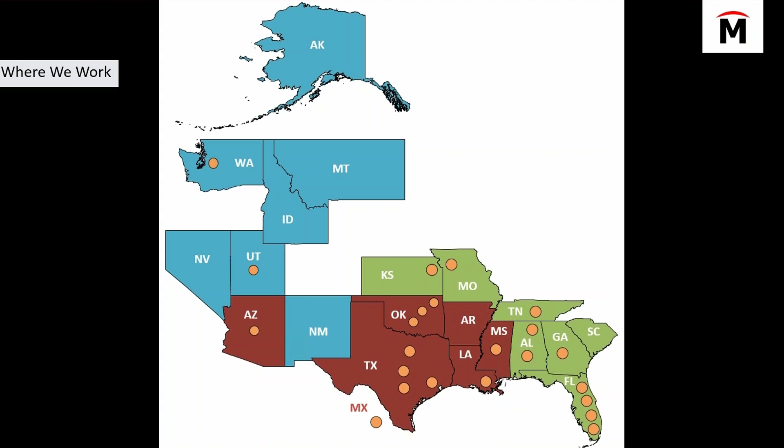This is a map of our territory. Everywhere that you see a dot is a physical brick and mortar office for MLC CAD Systems. And what's great about online training is you don't have to actually be in the office to take this training. You have more available classes to you since they're all online. So let's go ahead and get started and take a look at what online training looks like.

I want to get started and show you an example of what it's like to go through some online training with MLC CAD Systems. And what we're going to do is we're going to build a ratchet. And I'm going to build a ratchet that looks like this, so I want you guys to know where we're going. You see that we got a nice little ratchet here. There's no guts inside of it. This is just the actual finished product.

And the reason I like to show this is because even in a training class, I want you guys to understand where we're going and not just be led around learning features blindly. So I want you to have an idea of what we're trying to accomplish with the features that we're learning. So with this ratchet, it's comprised of three main sections. There's one right here, that's the handle. There's a neck, which is in between the handle, and then the last piece, the head. So we're going to make three separate features, learning some different tools to accomplish those features.

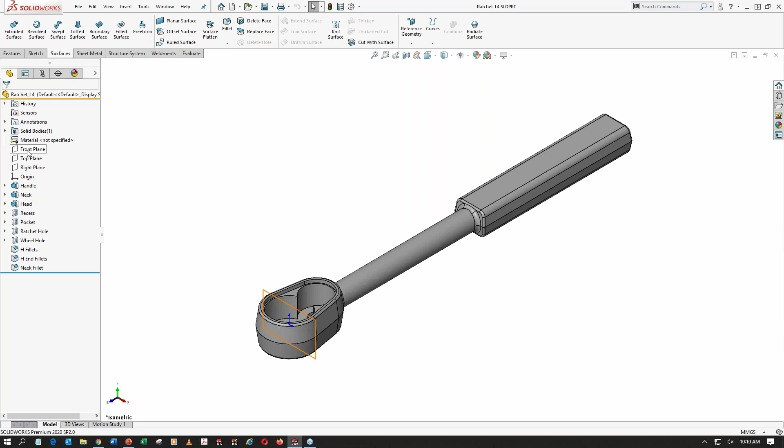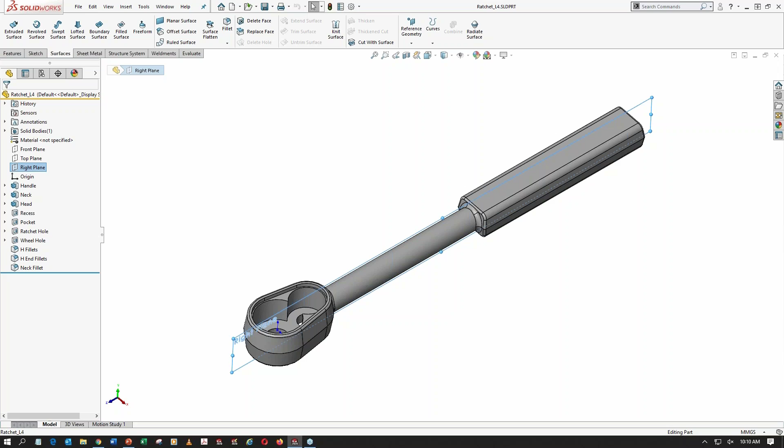Now, I do want to point out that we're going to build in some symmetry on this model. So you can see along the top plane that this model is very symmetric about the top plane. It's also symmetric about the right plane. So when we're designing this with our design intent, we're going to make sure that it's symmetric about the right and the top plane. So we can accomplish that with sketches, and we can accomplish that with features.

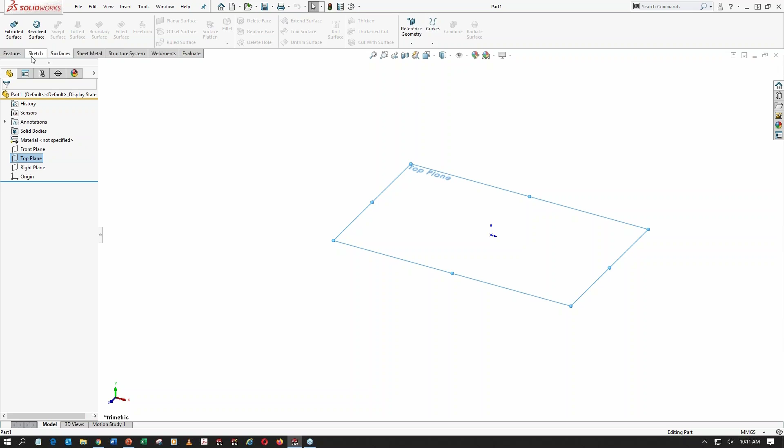So the very first thing we're going to do is we're going to sketch and we're going to model the handle. So I'm going to start brand new. I have no tricks up my sleeve. Just start with a brand new file here. I'm going to use a millimeter template. Obviously, there's no features in the tree, and there's nothing crazy going on. But the first thing I want to do is select my top plane. And when I select my top plane, I can then go to the Sketch tab and fire off an actual sketch.

Now, in some lessons, we talk about different topics, and in this topic, we talk a lot about construction geometry and symmetry. And one of the things that you can do is you can use this tool called a construction line. It's also called a center line, depending on if it's used in the center or if it's not in the center of something. But we can use these to reference what we call the origin, which is our 0, 0, 0 point out in space, and then draw some shape out in space without having to dimension all the way to the origin.

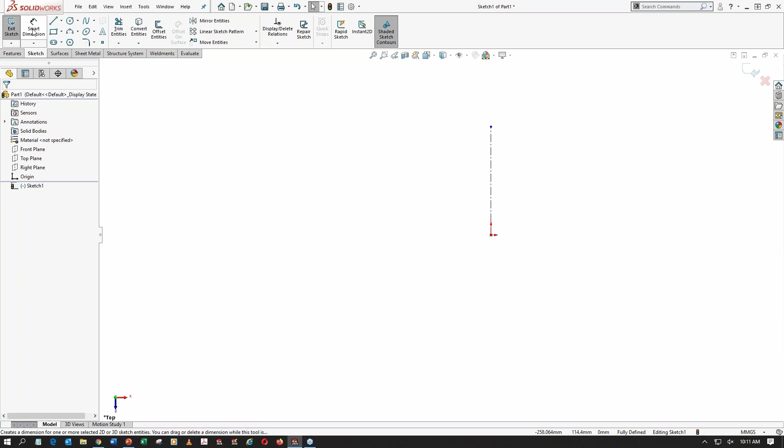So what I can do is I can then fire off Smart Dimension and grab the value of this and give it a value. In some other CAD systems, you've got to enter values in different places, maybe in the properties of a line. But with SOLIDWORKS, you're going to draw the line, and then you're going to tell it how long you want this to be. It's going to be 220 millimeters. Notice I didn't type any units. That's because we're in a unitless system. You just define the units up front, and then all you have to do is type your numbers.

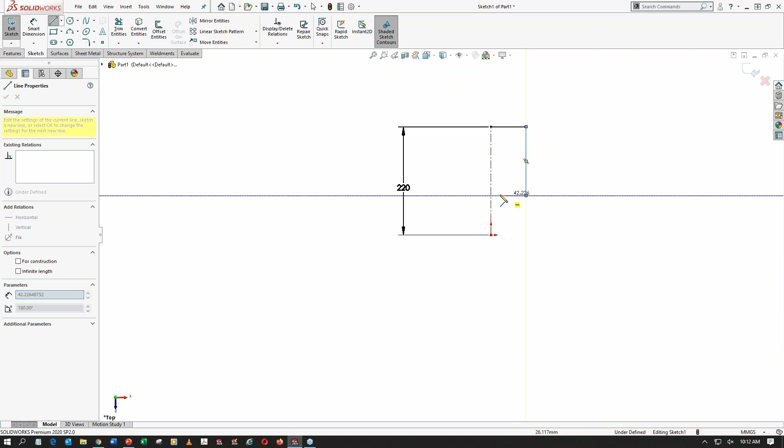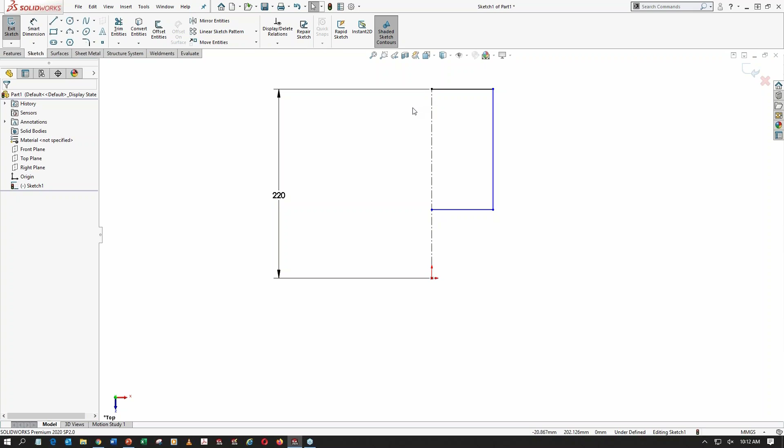Now, the reason I drew it like this is because what I would like to do is select all three of those lines and then mirror those entities around that construction geometry. So by hitting Mirror Entities, I can then say mirror about and choose this construction line. And now wherever the one rectangle goes, the other one will also follow.

So at this point, to fully define this sketch, and fully defining a sketch means that the sketch cannot be pulled any way, it is fully defined in X and Y, we're going to use our Smart Dimension. Now I want the overall length of the handle to be 100 millimeters long. Notice that the lines on the ends of our rectangle have now gone from blue ink to black ink. The reason being is lines that cannot be moved are in black ink. So you see now this rectangle can only be pulled left or right.

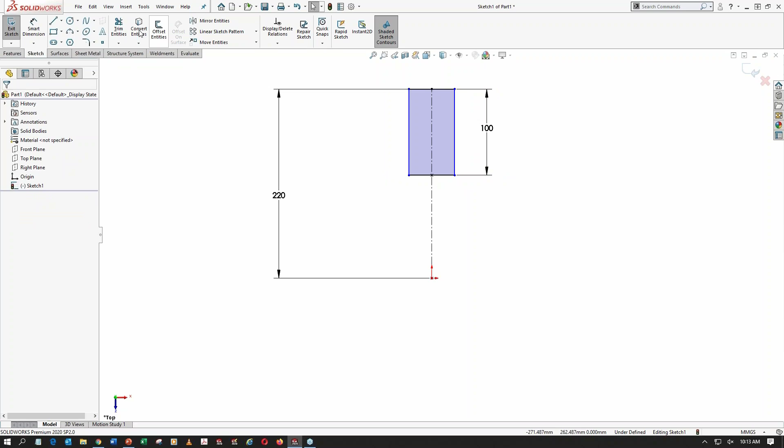All right, so at this point I need one more dimension, and this dimension is going to go all the way across that construction line, indicating that this is the overall width of this handle. And I want that to be 20 millimeters. All right, so now our sketch is completely defined. It says fully defined down here in our status bar. All of our sketch lines are now black, and we can now use this sketch for a feature. To do that, all I have to do is tell the software which feature I want. So I can go to the Features tab, and then I can fire off Extrude Boss Base.

Now I do want to point out that during training classes, what I like to do is go in and make sure that everyone can see things by highlighting and just circling things that might need more pointing out, and yellow is a bad color, red's a little bit better of a color. So if anybody asks, hey, where was that? Then all I have to do is circle it, and everyone can see exactly what button we're talking about. And that's that Extrude Boss Base.

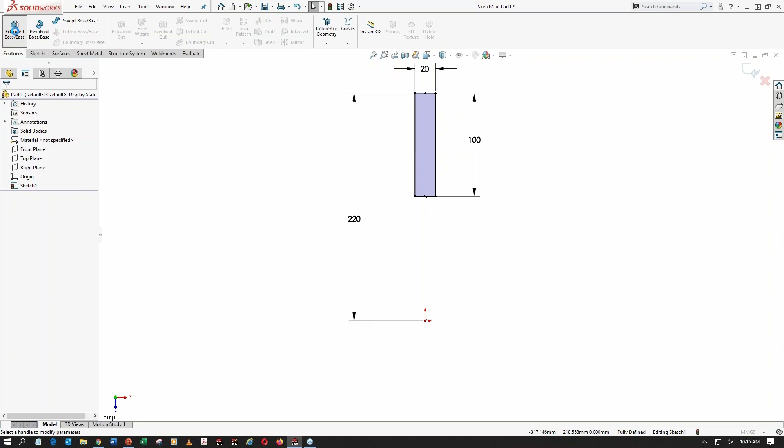Now when we extrude this, I want to make sure that we're building in that symmetry around the top plane and the right plane. I can do that by using an end condition called mid-plane. Now when I do a mid-plane extrusion, whenever I enter the value of this, I want to make sure that that is the value overall. That is not 15 millimeters on each side. That is 15 millimeters as an overall value, with our sketch being in the center.

Now, if this is going to be like an injection molded piece or a forged metal piece, then we're going to have to add some draft onto some of our faces, unless we just really want to ruin our mold the first time we use it. So we're going to have to add some draft. Now, I can add draft in a couple different ways. One of the ways is during an extrusion, and that's by activating this button right here to turn the draft on. And then I can add 8 degrees of draft.

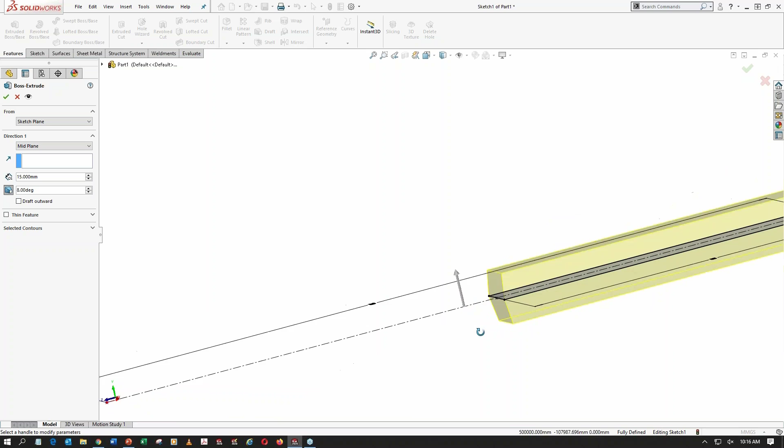Notice that whenever we add draft during an extrusion, it's going to draft every face. So you'll see that all of these faces all the way around are getting drafted. The last thing we want to do is draft outward. That's going to break our mold, and it's not going to be pretty. So I'm going to uncheck draft outward and make sure it's drafting inward.

Then I can hit my green check, and you'll see that I now have our handle out here in space. Now, one good thing that I would strongly recommend whenever you're modeling in SOLIDWORKS, a best practice to follow, is to name your features. Because when you get later down in a model and it says Boss Extrude 37, that doesn't mean a lot to anyone.

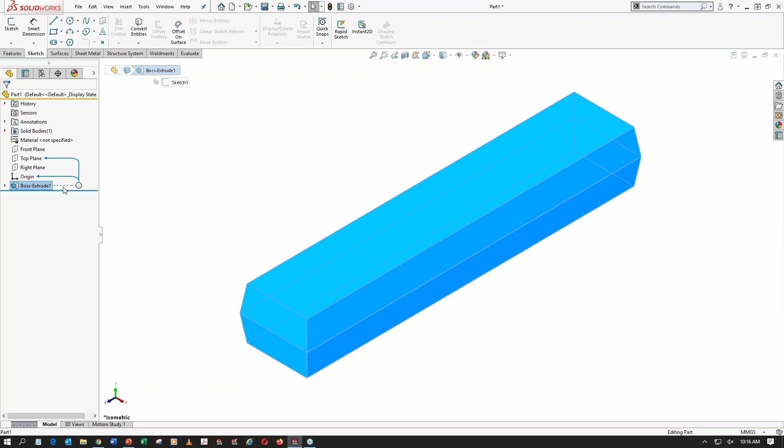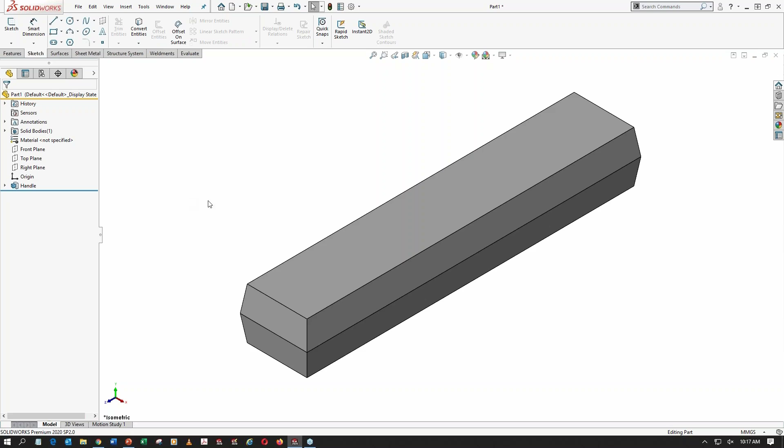But if you were to come in and rename this feature to handle, then that tells everyone exactly what part of this model that feature goes to. So you can do that with any feature. I strongly recommend naming features as you go, rather than going back and going, okay, this is still at 37. What does that mean? You can do that, but it's just not as easy.

Now notice that our origin is down here. That's because that's the only known point in space, and we use that construction line to design the handle way off in space. It was fully defined because we used the construction line to reference the origin.

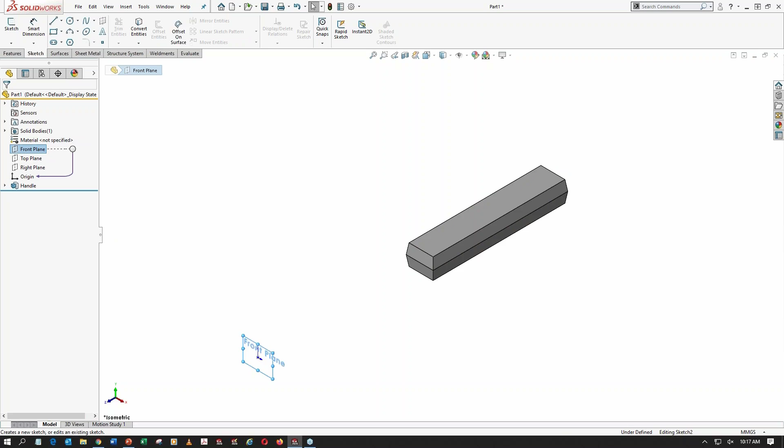But now what I want to do is I want to sketch on my front plane. And when I fire off a sketch on my front plane, my camera position is going to go normal to that plane. Now, if you don't want to do that, you can always use any keyboard shortcuts, or you could move your cursor to rotate your screen, but it's perfectly good for right now.

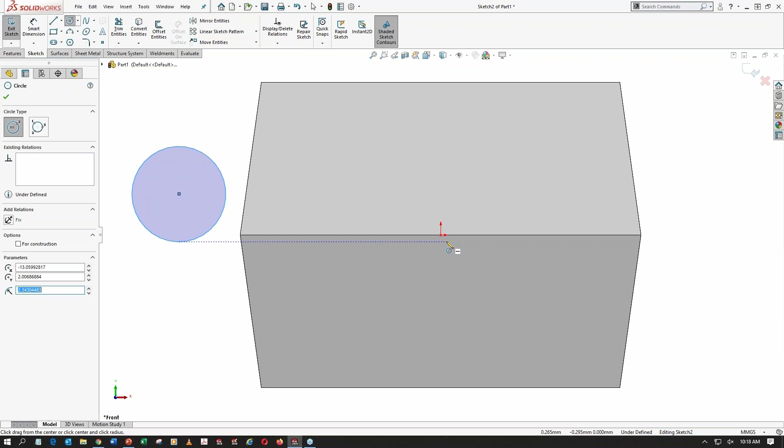I'm going to activate a circle command. Now the circle command is 2 clicks. So you're going to click the center and then the radius of the circle. So I want to put that right on my origin. And notice the yellow box indicating a sketch relation of coincidence. So that means I'm going to put the center of this circle on my origin. And then I can click again to give it a radius or a diameter.

Now I'm going to delete that first circle because we only need one. Notice that this circle will get bigger or smaller whenever you drag it. And next thing we need to do is fully define it by giving it size. To do that, I'm going to fire off the smart dimension.

Now, I do want to point out that down here, there is a size dimension for these circles. I would strongly recommend that you don't enter the value there, because if you were to enter the value there, you can just simply drag it and that value gets overridden. So you can see if I add 5 to that value and then I drag it, that value is just simply overridden. It is not anything that's set in stone at all. I would recommend using the smart dimension tool rather than the parameter.

So at this point, we can now give this thing a size. I want it to be 12 millimeters in diameter. The default for a smart dimension is diameter whenever you're defining a circle. Now I do want to point out that you could also go in and display as radius if you needed to. That's very beneficial whenever you need to pull dimensions into your drawing.

So I would recommend that however you want your dimensions showed on a production drawing, you should put those dimensions all the way down into your sketch level. In this scenario, I just want the diameter, but I do want you guys to know that you can define dimensions as radius or as a diameter.

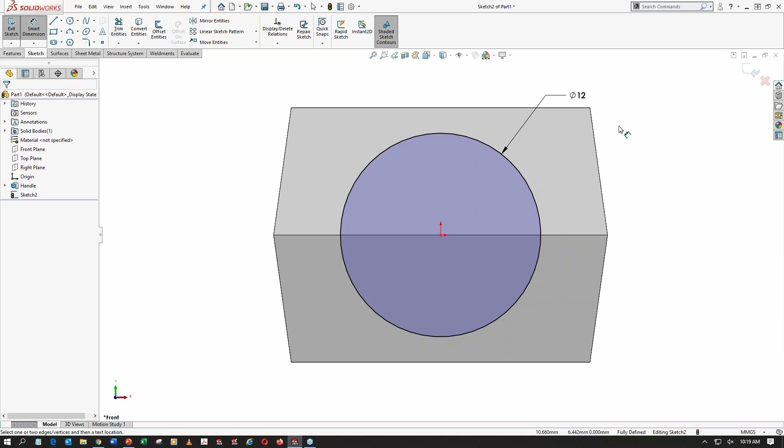Now I want to take this and I want to extrude this. And when I extrude this, I want it to go toward my handle. So that's going the wrong direction. I can either grab this handle and pull it that way, or I can hit this little flip direction, reverse direction button, these 2 opposing arrowheads. You'll see that my preview flips, and now it's going toward our handle.

Now, I don't know what that dimension is. Well, I mean, I do if I want to math it, but mathing's hard, and I don't really want to math. I mean, don't call me lazy, call me efficient. What I want to do is I want this to go all the way up to the handle and just match that face. So instead of mathing, I can use a different, what we call end condition.

That end condition, by default, is blind, which is like telling the Hulk to put on a blindfold and take X number of steps, or step X distance. And he can walk through any features or cuts or anything like that.

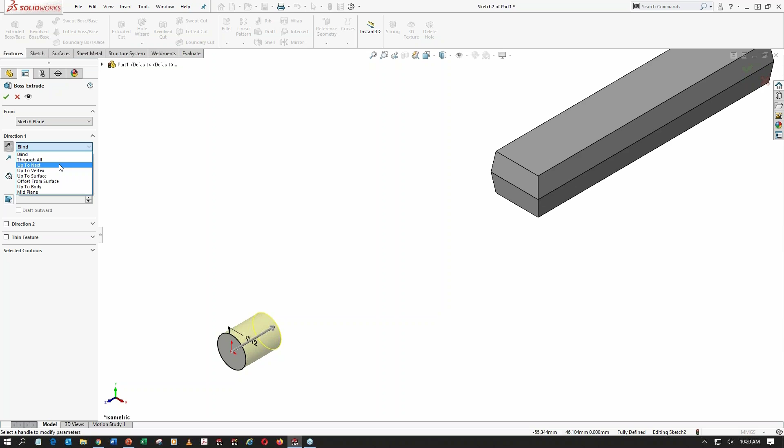But what I want to do is I want to say that I want to go up to next, or up to surface, or up to body. One of these is a little bit better than the other. But if I choose up to surface, and then I choose that surface, that looks right from this perspective, but you'll notice that whenever I mouse around and I rotate my view, that might not work. We could have issues with that.

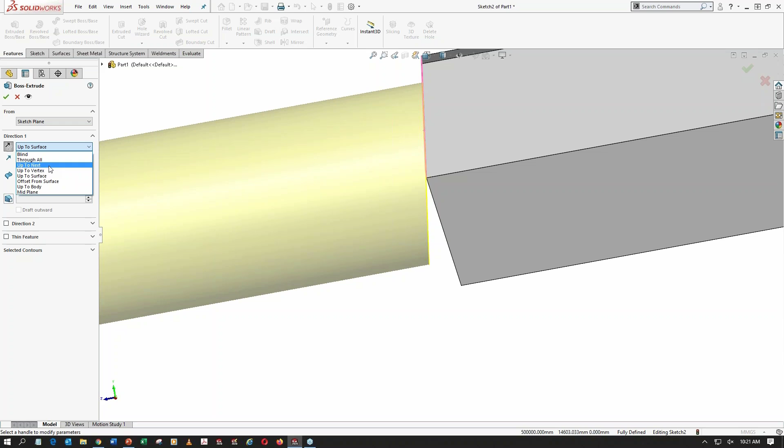We could be creating a torque wrench or a single-use wrench, maybe a Harbor Freight wrench. So maybe what I want to do is have that match all the way to the handle. So this might not be the end condition that I want. Now there's 2 other end conditions that are a little bit better than up to surface. One of them is up to body. Now when I choose up to body, I'm forced to choose the body that I want it to go up to. So that's an extra click.

I want a super efficient mouse. So instead of all these extra clicks and extra movement, what I can do is I can just say up to next. And it just goes up to the next faces and says, cool, I'm done. I can then hit my green check mark to accept that feature. And instead of Boss Extrude 2, I want to rename this feature to neck. This is the neck of the ratchet. So notice that when you're renaming your features, it is very beneficial to be able to see that and go, okay, I know exactly where that is on the model.

Now the next thing that we're required to do in this design is create the head of the ratchet. Now this is probably the most complicated section of the ratchet. Even though it's not that complicated, it's a little more complicated than a rectangle and a circle. In reality, it's just 2 circles with 2 lines. So I guess you could break that down to 2 lines and 2 arcs. But what I want to do is sketch that on the top plane. And the reason I'm sketching that on the top plane is because we're building in that symmetry. Just like I did for the handle, we extruded in a mid-plane extrusion so that we're building that symmetry. I'm going to do the same thing for the head.

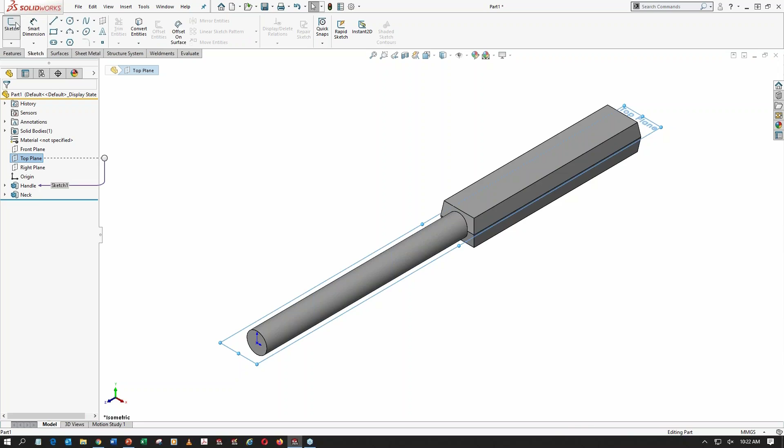So on the top plane, fire off a sketch, and then I'm going to sketch the head shape out here. Now, one thing that I like to do sometimes is draw my shape out here, fully define it, and then snap it into position. And that's what we're going to do for this head. So I'm going to draw with a line.

Now, whenever you're drawing a line, when you complete that line, notice that SOLIDWORKS is a click operation. It's real clicky like a high school. Not that it's bad, but whenever you come back and you touch that end of the line, it's going to turn it into an arc. So it's automatically switching from the line tool to the arc tool. So what that means is you could come back and turn it off by touching the, oh dang, it didn't turn it off. It stayed at an arc.

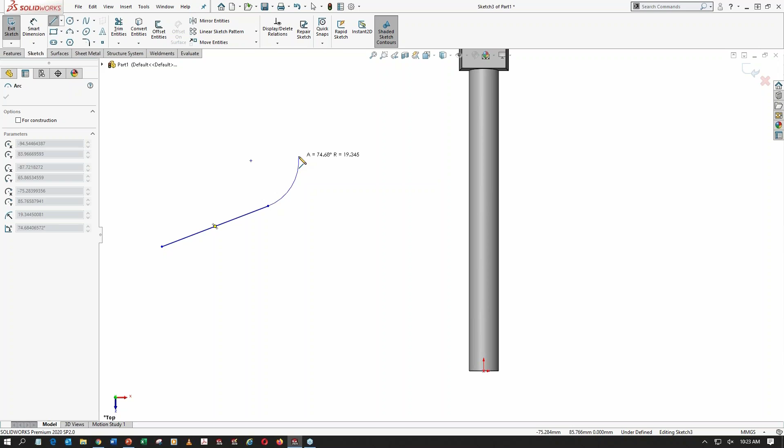So instead of coming back and touching it and turning it on or off, you can hit the A key, A for arc. So notice that it's still in our line command. If I hit A for arc, it then goes to that arc command. So you can very quickly draw shapes that require lines and arcs. So pretty quick you can draw any shape you want with a line and arc.

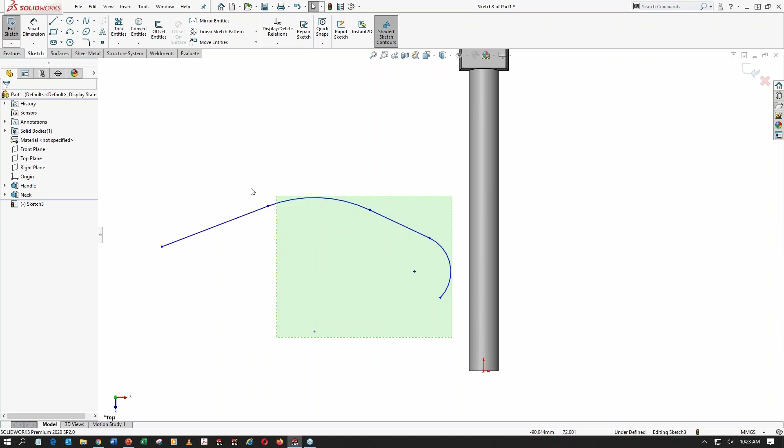Now I want to draw the head of this ratchet. Now I want to reference back to this completed ratchet. And if you'll notice the shape of this ratchet, it's an arc with a line and an arc and a line. All right, so it's not terribly complicated, but that's the shape that we're going to draw.

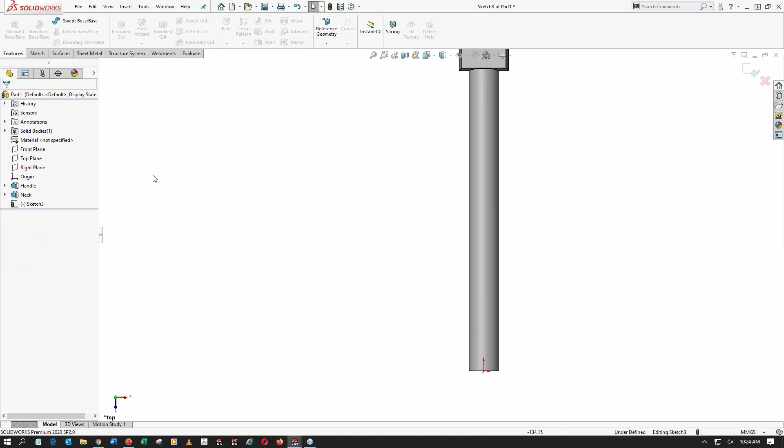So on our sketch tab, I want to fire off a line, and then I'm going to go straight up, hit A for arc, come all the way over, and use my blue inferring line so that the endpoints of these arcs are horizontal with each other. And then I can ride down this yellow inferring line until I see my blue inferring line, indicating that I am tangent with the arc that I was just drawing, but I'm also horizontal with the start point of that first line. When I see that, I can click again. Now it's still in our line command, but I want to go back to an arc so I can hit A.

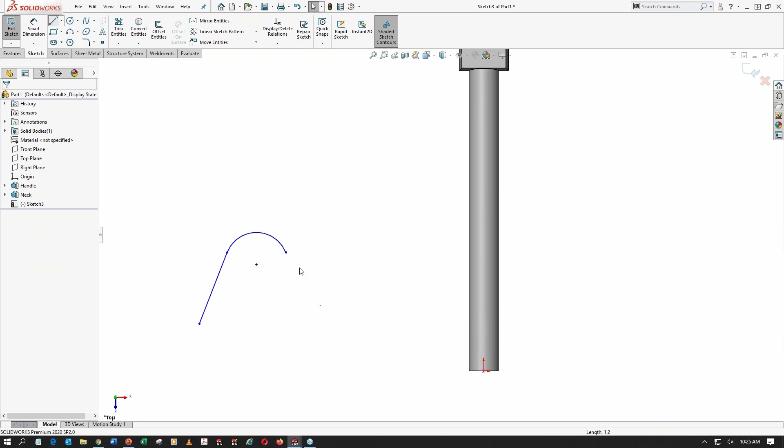Now, one thing I see people doing is holding down A. Don't do that, because then it just swaps really fast between line and arc. That is definitely not what we need to do. So just make sure that you're not holding down A.

Now, I'm going to go back to arc, come all the way back around, and then what I can do is turn on my sketch relations. So I can turn these things on right here. Sketch relations look like a little perpendicular symbol. And notice that I have a tangency there and I have a tangency there.

I need 4 tangencies, so I want to make sure that this point, and starting in 2019, you can click on a vertex and choose Make Tangent. You'll see that that tangency then pops up. Because prior to that, you had to choose a line, hold Control, choose the arc, and then you can make that tangent, or you can add the relations over here in the property pane. Either way, I now have 4 tangent relations.

Then I can draw a center line between the 2 centers of the arcs. Now the reason I like to do that is because I have a handle. I can yank this shape around with this construction line. It gives me something that's a little bit easier to dimension as well. Plus, I can choose this line and add a relation to the line. I can say that that line is vertical, which then forces the 2 arc centers to be vertical. So that's perfect. That's exactly what I want.

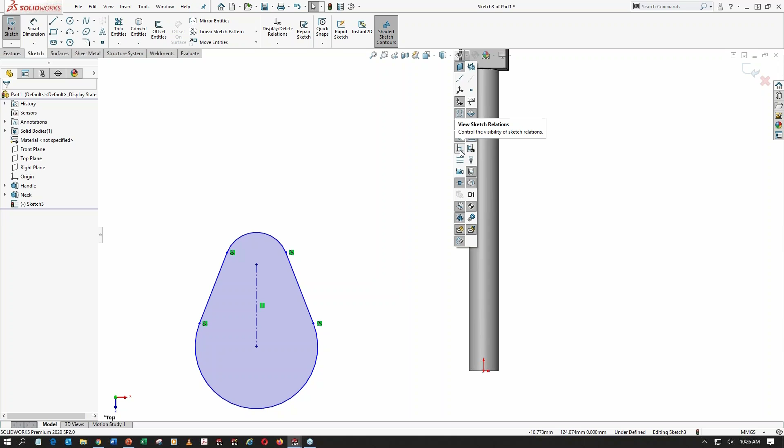I'm going to turn off my sketch relations because, now this isn't a complicated sketch, but in something a little more complicated, there could be a ton of sketch relations. So I'm just going to hide them, and it looks a little bit cleaner. Now I can dimension this thing. I want the overall height from center to center to be 12 millimeters.

Then I want to define the radius values or the diameter values of these 2 arcs. Well, the default for a complete circle is a diameter. But if you don't have a complete circle, the default dimensioning scheme is a radius. So this one is going to be a radius of 13. But if you wanted to show this still as a diameter, you could still swap this and display as diameter. So that way you don't have to multiply or divide by 2, because that can get complicated sometimes. Maths are hard. But this bottom radius is going to be a radius of 16.

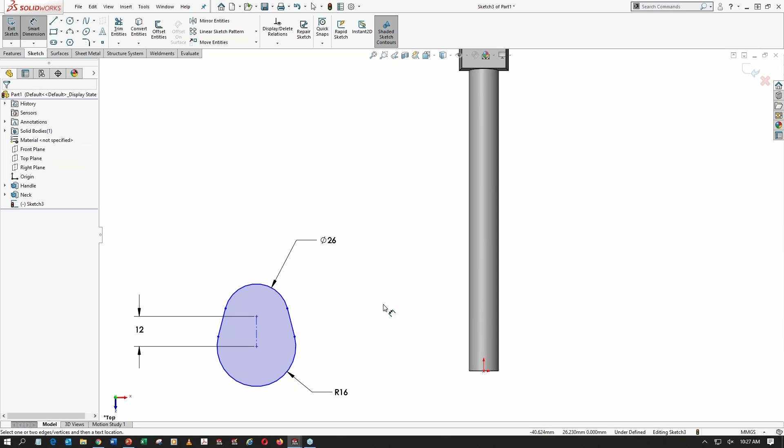Now, this is a fully defined sketch, except for the fact that it's not. How's that for circular logic? So you'll see that I can drag it around, and it moves in and of itself, and it doesn't distort. That's kind of the key to a sketch. Does the sketch distort? A lot of times in training classes, people ask, hey, is this sketch right? And when you look at it, it's still blue, so I ask them to drag a vertex. If it stays in the same shape but just moves, you're probably headed down the right path.

Now, I want to take the center point of this bottom arc. I'm going to hold Control, and then I'm going to grab the origin of our model. When I use Control in SolidWorks and select multiple things, it allows me to add sketch relations, or inside of an assembly, it will allow us to add things like mates. But here in a sketch, it will allow me to add sketch relations. Sketch relations are going to hold things together. It's like the glue inside of a sketch that holds all of your sketch entities together.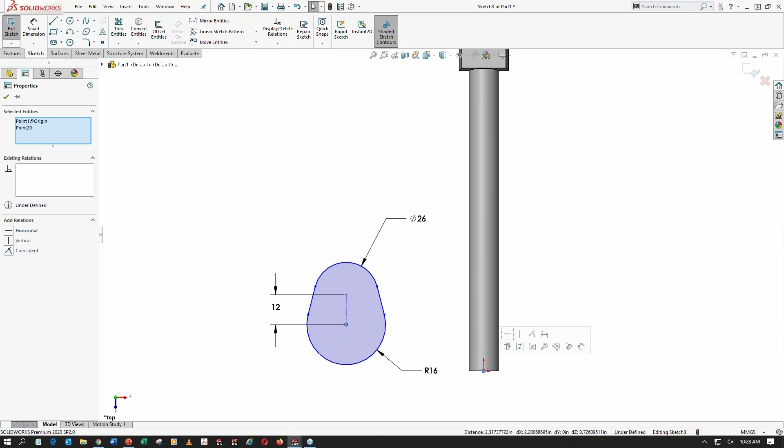So I want those 2 points to be coincident. So they're just going to be smack dab on top of each other. You'll see all of our blue ink went to black ink, so now we're good to go. In our status bar, it says fully defined. And at this point, I can now use this sketch for an extrusion or a cut if I needed to.

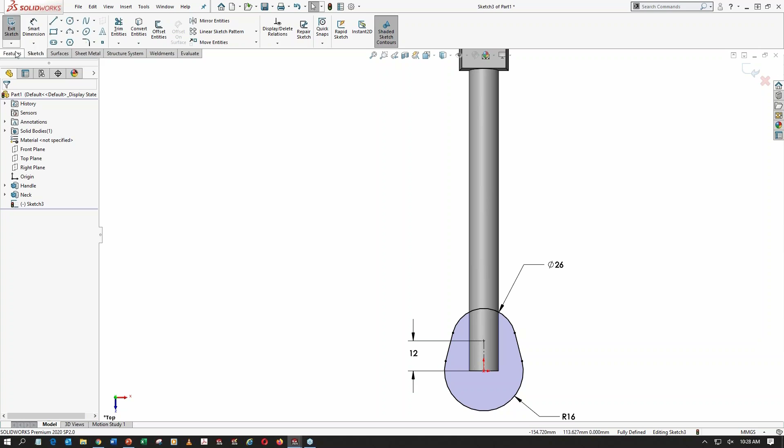In this scenario, I wanted to extrude it because we're creating the head of this model. Now notice it goes blind, and I don't need the blind extrusion. I want to build in that symmetry, not only in the handle, but also here in the head.

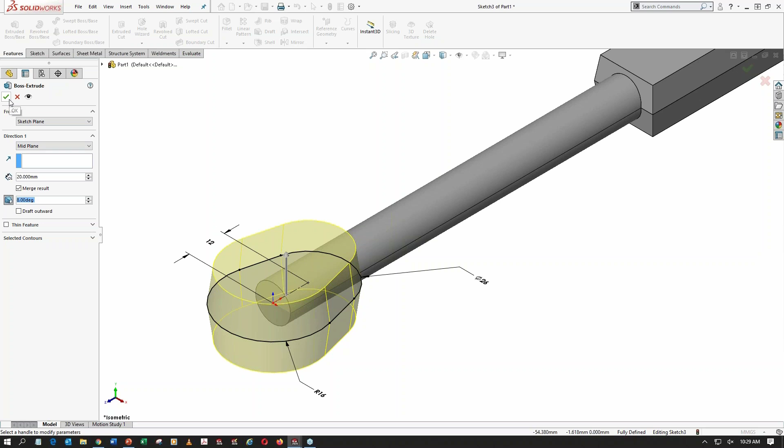So I'm going to change that end condition to midplane. Now, when I'm extruding this, again, remember that the overall height of this when using a midplane end condition is the overall height, not from your sketch plane out. So I want this to be 20 millimeters, and I'm going to add draft here as well. So I'm going to say, hey, you know what? I want some draft. I want 8 degrees of draft on this one as well, and then hit my green check. So you'll notice we now have the head of our ratchet.

One thing I want to point out, that when I edit this feature, when it's extruding, notice that we went around the shaft of that neck. Now, what happened to all that material inside? Well, there's this green check. There's a check box that says merge result. If you were to not merge that, then you're going to get 2 separate bodies. You'll see that there's a neck body, and you can kind of see it inside of there, and then there's also the head body.

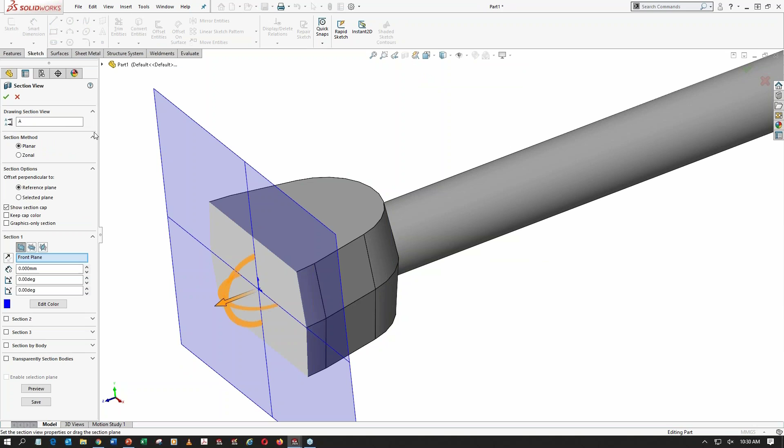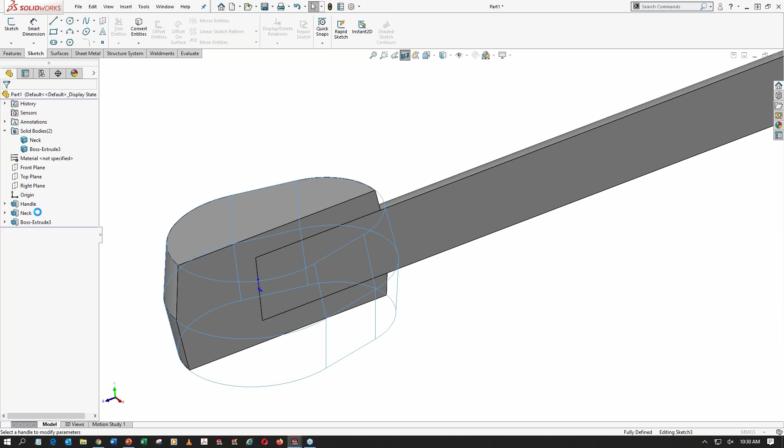Now, I don't necessarily want that in this scenario, but that is something that you could do, especially if you're designing something like manifolds or something that creates cavities inside of other geometry. In this scenario, I do want to merge that result, and I want to make sure that all blends together. Now, you can check that by hitting this tool called the section view. And if I were to section this model, you will see that now this is one solid piece of material, versus if we were to not merge that result, then it would be 2 separate chunks of material. So definitely 2 drastically different results from a tiny little checkbox. So be cognizant of whether you're merging results or not.

Now, to turn the section view off, all I have to do is hit the button for section view, and it turns it right back off. Now, I do want to rename this feature. We're going to rename this to head. So now you'll see that we have our 3 extrusions, and we have our handle, we have our neck, we have our head. Now, this is how we're going to show our model if we're going to get it forged out of metal. Maybe we're going to get this like cast steel or cast aluminum or whatever you're going to do to get this ratchet manufactured.

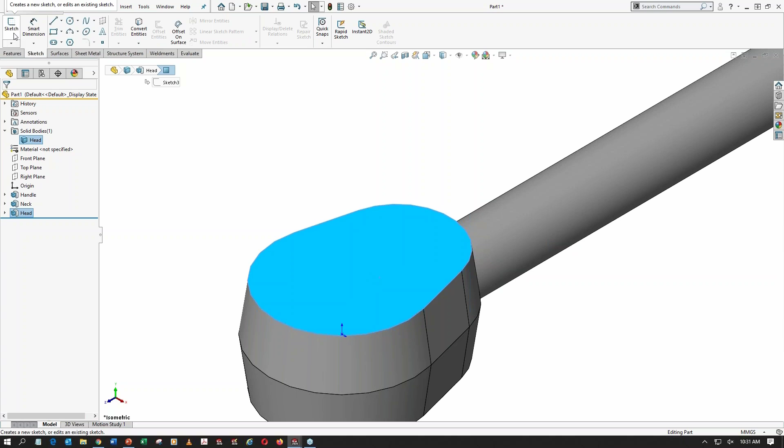But once it comes off the forge, we're going to have to show this in the machine state, right? So we're going to have to pull these into maybe a CNC, maybe a whole batch of them, and we're going to have to mill out the area for the ratchet internals. So let's tackle that now. So I want to create a recess where we have a piece of sheet metal that can cover all the internals so we don't get any dust in there, and it protects all the gearing, and we can keep it all nice and greased up. So in this space right here, I'm going to fire off a sketch. So I'm going to go to the sketch tab and hit the sketch button.

Now, again, it takes me normal to my sketch. That's like opening a notepad and saying you want to draw a picture. The first thing you're going to do is probably turn it towards yourself, normal to your view. If you're not, then you're just kind of drawing blind, like some of those challenges where people are drawing on each other's backs. So we want to make sure that we're not drawing blind. We want to be looking directly at it, and that's why our view changed to normal.

Now, I could sketch another shape in here. If my design requirement was such that I wanted a 2 millimeter offset from this existing edge out here, I could sketch that and I could dimension it. But let's not work too hard. Let's only work hard enough. Let's work hard enough to get our job done. So what I can do is I can come up here and use this tool called Offset Entities. Offset Entities will take an edge of any highlighted face, like what you see here, and will offset all of those edges in one direction or another.

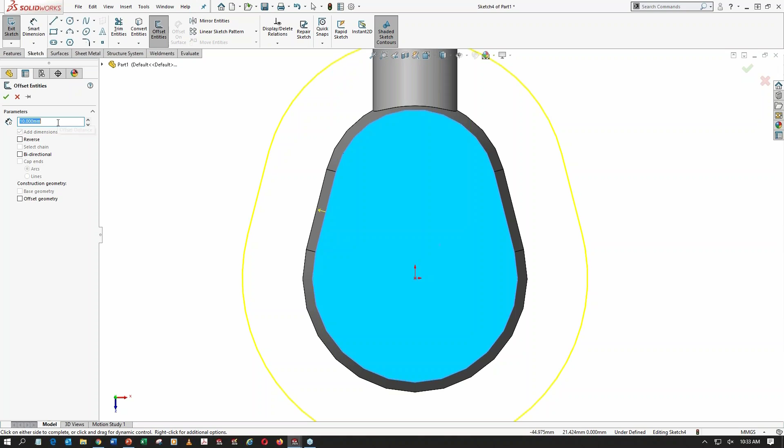So you see right here, it's a 10 millimeter. I can hit this reverse direction, and it will come inward, which is the direction that I want. But I want a 2 millimeter offset. So entering my value of 2 millimeters and accepting that command, you'll see now I have a fully defined sketch, and it's even driven with a dimension.

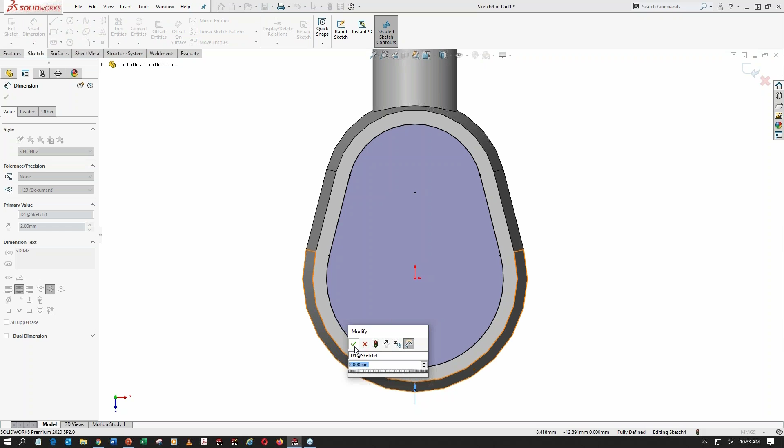So at any point, I could double click that dimension, and I could change that offset value. So it's very easy to create and modify offsets. Now I want a 2 millimeter cut. So we went 2 millimeters in, and now I'm going to cut down 2 millimeters. Maybe we have a piece of metal. Our cover is a 2 millimeter thick piece of metal. So we need to create a pocket for it, and we're going to call this the recess.

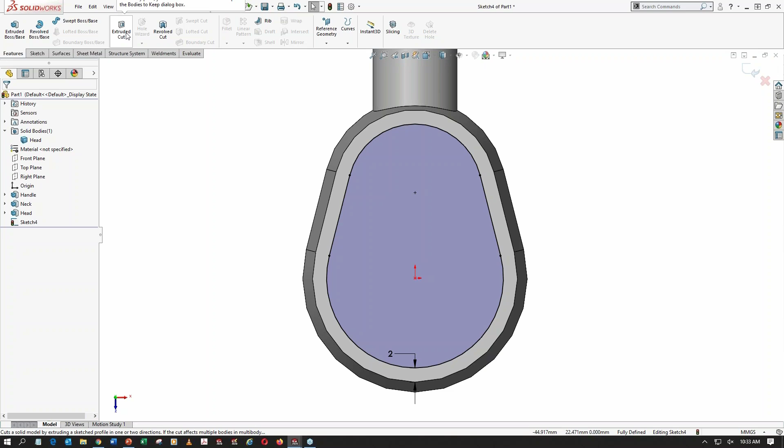So I'm going to hit Features, and we want to remove material this time. Up to this point, we've been adding material, and now we're going to remove material. So Extruded Cut. This one is going to be blind because I know for a fact that it's 2 millimeters. It's a fixed size, so it will always be 2 millimeters. So I can then hit my green check mark. Again, we're going to call that the recess.

And so R-E-C-E-S-S, one of those words I spell wrong all the time, so I just kind of say it like Mississippi. But anyway, we have handle, neck, head, and then we have our recess.

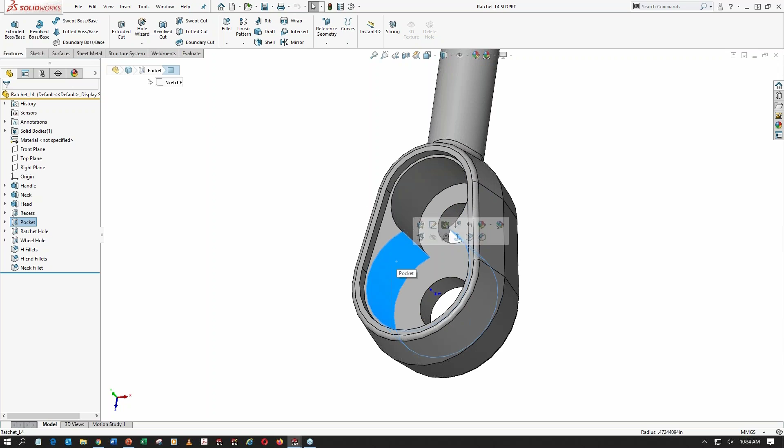Now, I want two massive circular holes. If we go look at our completed ratchet, you'll see that we have these two circular holes. Now, these circular holes are going to allow us to put all of our gearing in here. And when we put our gearing in there, we're going to need that space. So we're going to have to remove that material so that we can actually add our gearing. So we're going to have a ratchet area and a wheel area. Now, to create this, what I need to do is create two circles and then remove the material in between.

So let's jump back over to our in-process or in-work ratchet. I need to create a sketch right here. And when I create that sketch, again, it's going to go normal to my view. I can zoom in. I can then put a circle. And I want to do something that's called waking up the center point. When I wake up the center point, all I have to do is hover my cursor over the edge. And then it will divulge the center point of that edge that you're then hovering over. So then I can use that for a coincident relation to put this circle.

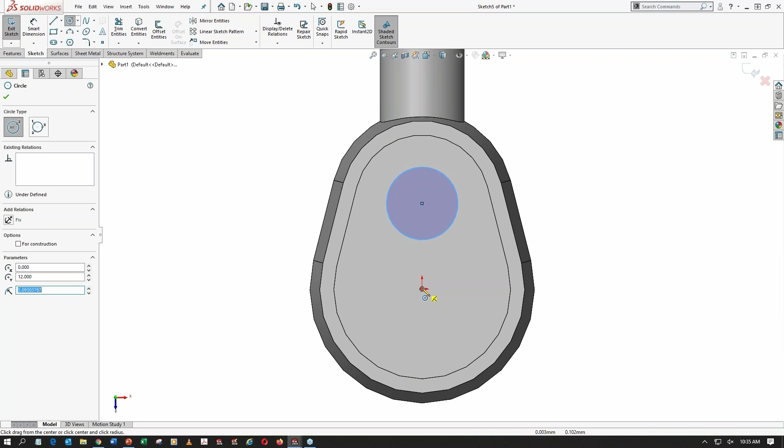I can then come down here, and the center point of this was actually the origin, because that's that sketch relation that we created. So whether you wake up the center point or whether you use the origin, either way, they're in the same spot. So I'm going to make a coincident relationship right there, and then go ahead and place it. Now, all I have to do again is to define these in shape. So their position is defined, just not their size.

So this is going to be an 18 millimeter diameter circle, and this one is going to be a 24 millimeter diameter circle. Now, I want to remove that material inside. So if you're talking about a Venn diagram, I want to remove the section in the middle that's the same.

Now, whenever we're talking about Venn diagrams, all I can think about is Venn dieselgrams. You guys probably didn't know that there was such a thing as a Venn dieselgram. It's just like a Venn diagram, but a little more complicated. So does everyone remember what Vin Diesel looks like, right? If not, then Google it really quick on your phone and look at Vin Diesel. And then I want you to understand what a Vin Dieselgram looks like. So if The Rock and Joe Pesci had a baby, he would look like Vin Diesel. The longer you look at it, the scarier it gets. So go ahead and lock and load that one in your back pocket so you can discuss it at the water cooler with your coworkers. So just take that one and do what you will with it.

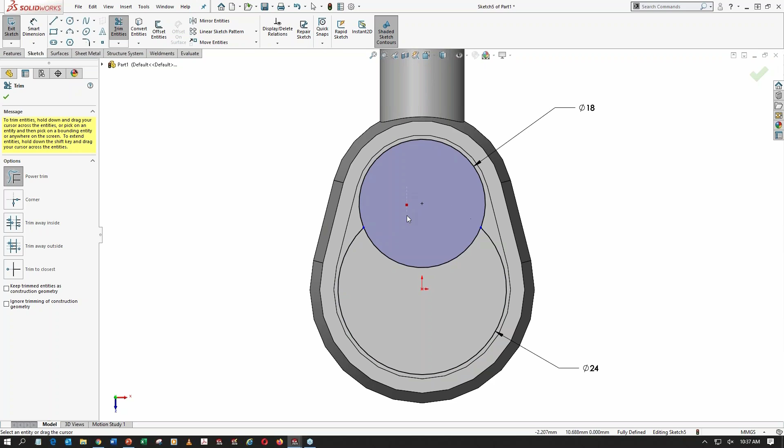But what I want to do now is I want to use this tool called Trim Entities. And I can use Trim Entities to get rid of Vin Diesel. All right, so we can just get rid of that, and now we're left with The Rock and Joe Pesci. Now, the trim command is really awesome. I like the trim command a lot because you can take any lines that you might have, and you can use the trim command to either extend or to trim away.

So in this scenario, maybe I wanted to extend that one and then trim it away. And that's exactly what the trim command does. So you can see just dragging through things allows me to remove. And then I can always drag back through these little red boxes, and it will bring back, it's like doing a Control Z on your trim. So you can see really quickly, I can get an enclosed area using that trim command.

All right, so I like the trim command a lot. I use it very often, and it allows me to extend or trim closest or nearest all in one tool. Okay, so now we have our completed shape here, and what I want to do is use that for a cut. So let's go Features, Extruded Cut.

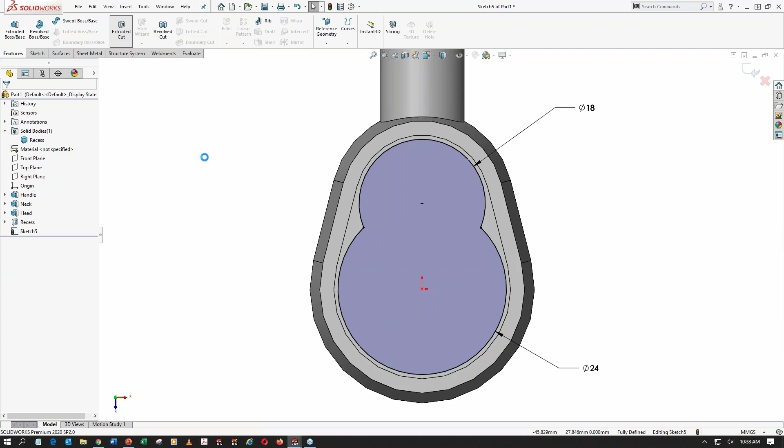We're going to cut down into our model, but this time we're faced with a different challenge. What if you don't know the height of this head? Maybe it's a variable height, and we don't know every time what it's going to be. So it's not necessarily that we don't know how to math, it's the fact that we don't know every math option available for this ratchet.

But what we do know is that our design intent says that we need a 5mm wall left over after this cut. So maybe the engineers that stress tested this said, hey, we have to have a 5mm wall, otherwise this thing's going to just break. So what we could do is turn on the measure tool, measure that distance, then subtract 5, and then we know how deep to cut it.

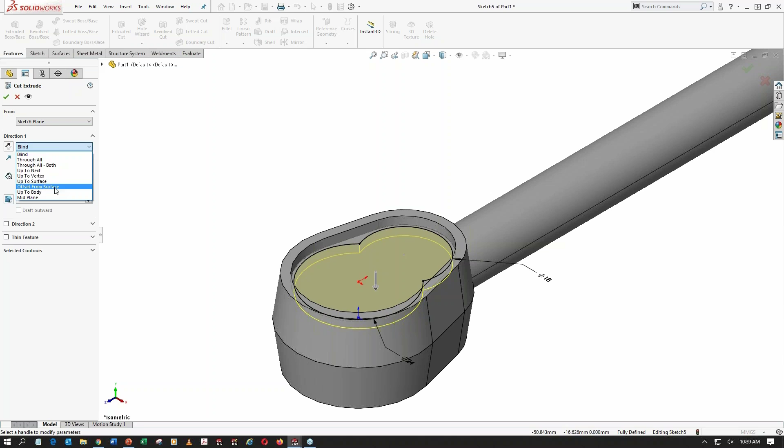But I don't even want to do that. I want to take this and make it a little bit more intelligent. I'm going to change this end condition from blind to offset from surface. When you choose offset from surface, I then have to choose the surface I want to offset from. So I can choose this face, and then this value is the leftover wall thickness. I can make that 5, and then I can hit my green check mark.

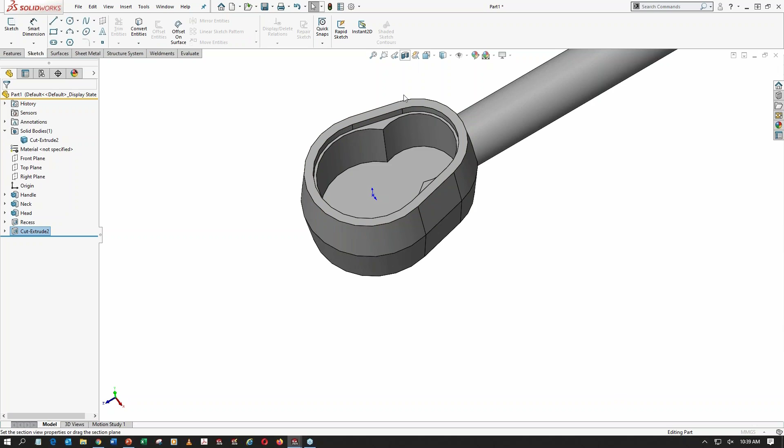You'll notice that it just has a cut in there, but I can turn the section view on, and you'll see that there is in fact material left. We can go to the Evaluate tab, and we can fire off the Measure tool. The Measure tool looks like a little tape measure, go figure. I can choose a face, rotate around, choose another face, and then it's going to give me the actual distance from one to the other.

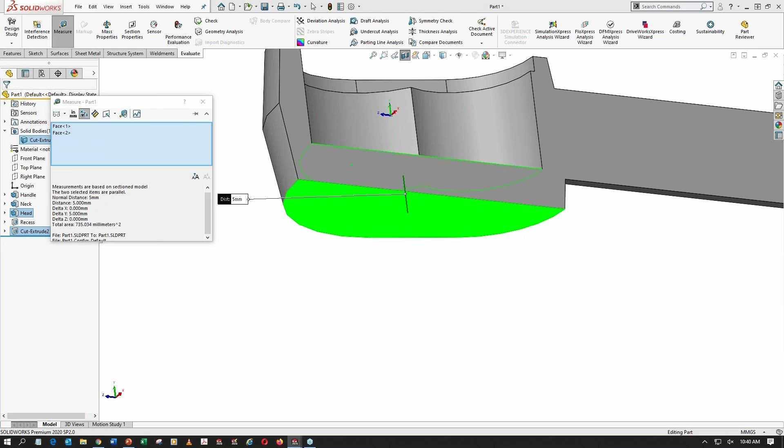Now notice I'm in an inch template, so I can hit the IN/MM and say Use Document Settings. You'll see I'm now 5mm away, which is exactly the value that we specified during that feature. So let's turn this back off, and I want to rename that feature, and that's going to be our pocket. All right, so we removed material for all of our gearing inside this ratchet.

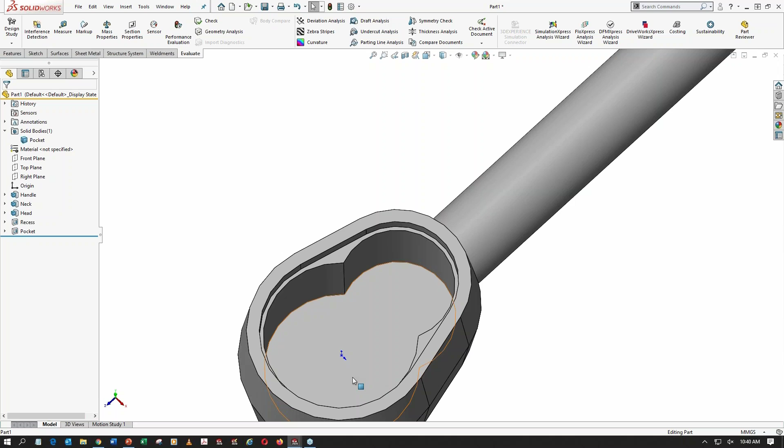And now I need some holes back here. So I need a hole that holds everything in, and then I need maybe a hole that disconnects our ratchet so you don't have to yank it off there. So I need a ratchet hole and a wheel hole. Now I want those to land on these faces, and I'm just going to fire off a sketch. And then I want to put a circle down here.

Now this one, I'm going to wake up that center point on this arc, or that radius edge. And I want this to be some size, and in this scenario, our wheel hole is going to be 9mm. So that's a fully defined sketch. I can now take that and do an extruded cut all the way through. That's exactly what I want. This time the end condition, instead of being blind, is going to be through all.

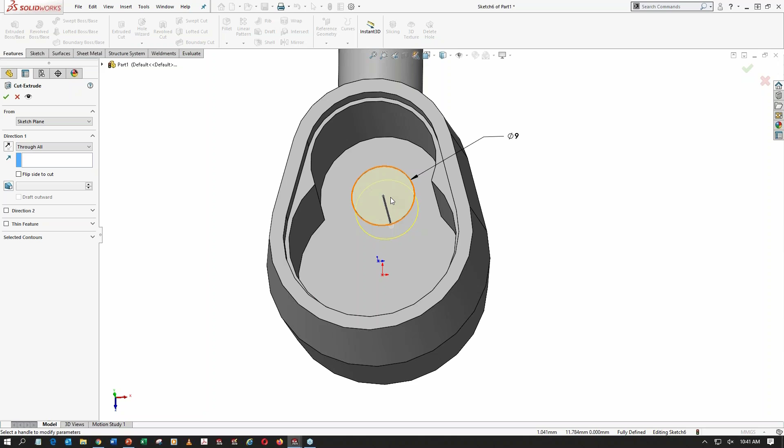Now notice a blind end condition of anything 5 or greater is technically a through all. But design intent says that you should do a through all rather than a blind, because what if someone comes back and says, hey, we found some problems out in the field and we're going to have to increase this thickness. The last thing you want to have to do is go back and make sure every single value is accurate. So I can say through all, because my design intent says I need that to be through the material no matter what. So that's perfect. I can hit my green check, and I want this feature to be named wheel hole.

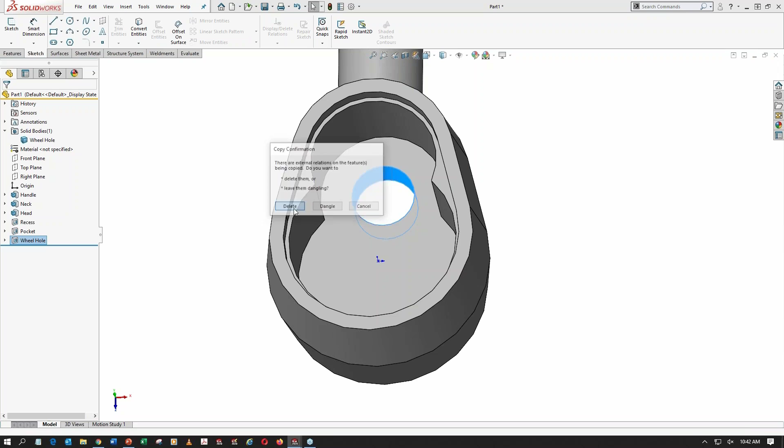Perfect. Now, there's a way that we can expedite this process. I could choose this face, I could do another sketch, but another thing that I could do is I could simply just drag this onto that face. So I'm dragging our wheel hole back onto that face. Now it's going to ask us what we want to do with the relationship inside that sketch, because there is that coincident relationship. So we can leave them dangling or delete them. In this scenario, I'm going to say delete. But you'll see that I get another hole that landed on that face.

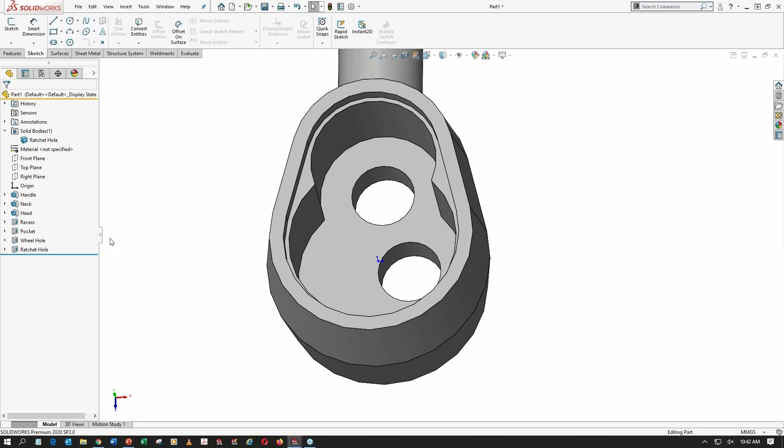I can then call this a different feature name, ratchet hole. Now these are two independent sketches and features. So notice it has a separate sketch number. That means they are not tied together. So at any point, I can go edit the sketch, and I can give this a relation back to the origin. So now it's fully defined, because best practice says we use fully defined sketches at all times. Now all I've got to do is exit the sketch and make sure that it's in position.

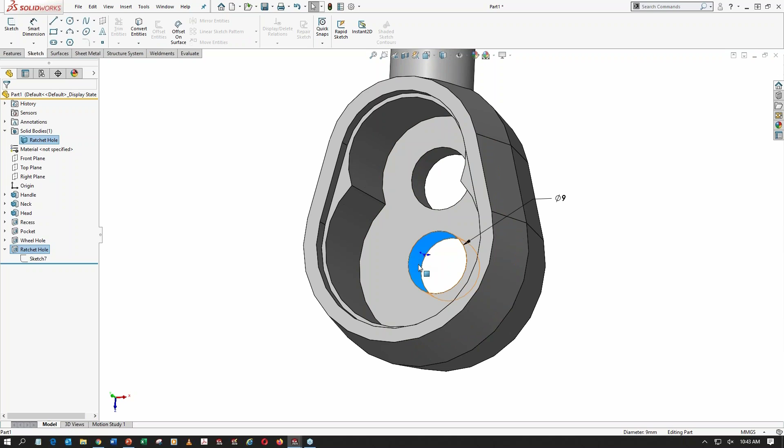One thing I did miss out on, though, is the size. So I can double click the feature, and anytime you double click a feature or you double click a face, it will show all the dimensions used to make that face. So I can then double click that 9, and I can change that from 9 to 12 to make it a little bit bigger hole. And then I simply rebuild the model, and you'll see that we now have a larger hole.

Now, one thing that we might need to do here is we might need to add some fillets.

So we're going to add 3 different types of fillets. Okay, so the fillet is on the Features tab. We're going to fire off fillet. Now, when you fire off the fillet, there's a bunch of different types of fillets that you can do. We're going to talk about a normal, constant size fillet. Now, there's also variable fillets and face fillets and full round fillets, but right now we're talking about a normal, constant size fillet. Now, if you're doing a manual fillet, you can only do one size fillet at a time.

If you were to find yourself in a scenario where you need to add a bunch of different size fillets at one time, you could fire off the Fillet Expert and you could add a bunch of different sizes at once. But for right now, let's talk about the manual fillet, and it's a normal constant size. So I want to do a 3mm fillet.

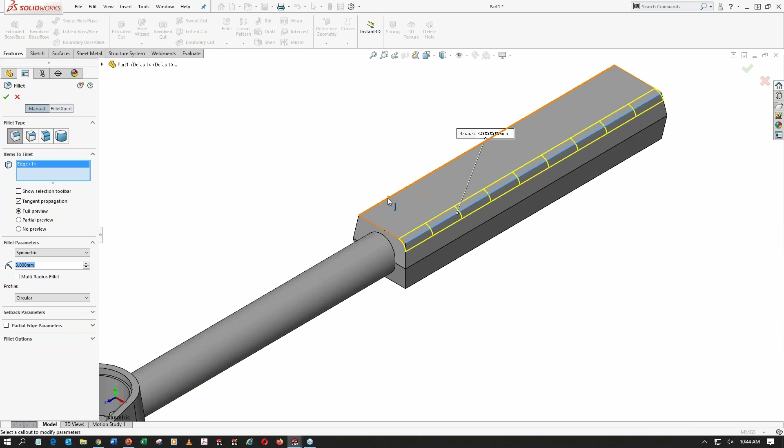And in this 3mm fillet, we found that the guys out in the shop, they were cutting their hands. So we need to smooth off the handle of our ratchet. That way, it's a little bit smoother. We don't have anybody out in the shop bleeding, so you know, safety. That's still a thing. So we need to make sure it's not sharp. Now I need another fillet because, well, let's rename that one first. It's going to be handle fillets.

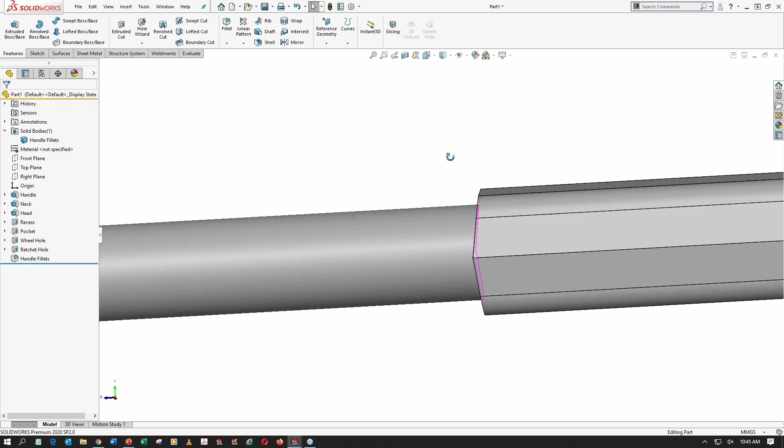And then I want to make sure that this edge is rounded off as well. So notice that there's an edge that goes all the way around. But notice that it comes to an apex out here. And the reason being is we added that draft for our symmetry of this model. So when I fire off a new fillet command, I want to make sure that our fillet is the right size, first of all. I want this to be a 1mm fillet. And I want to choose that edge right there.

But when I choose that edge, I want to make sure that this option, tangent propagation, is on. Because this edge and that arced value, or that radius right there, is tangent together, and that radius is tangent with that flat edge and goes all the way around. So when I choose this edge right there, because of the tangent propagation selection, it goes all the way around. Notice what it looks like without that option selected.

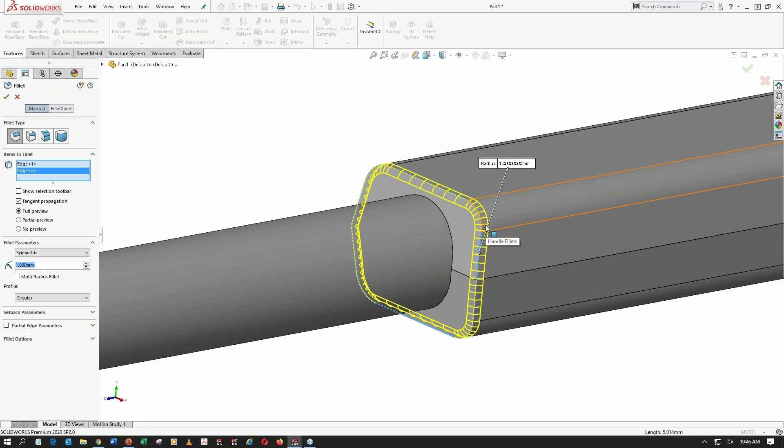I do want tangent propagation, which just makes it easier for me as well, because then I can just come down here and choose the other side, and you'll see at that point it goes all the way around. The reason it doesn't go all the way around with one click is because those aren't tangent. It's just plain and simple. So that vertex stops that tangent propagation. So then I can choose that edge, and I can choose this edge. Now both ends of the handle are filleted.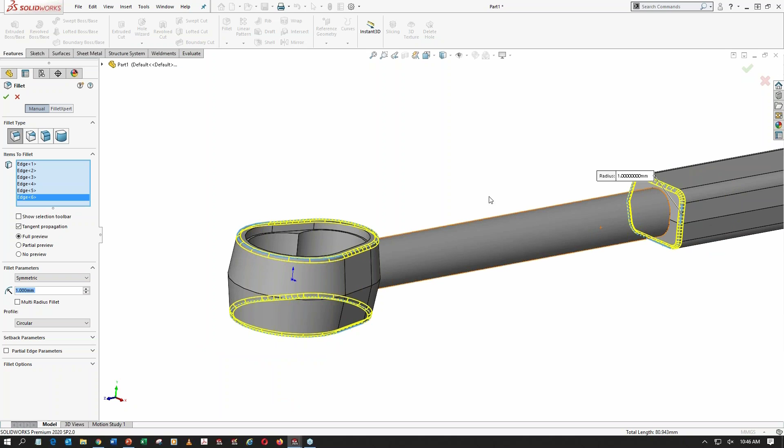Now I also want to come over here and add a fillet to the head of our ratchet to make things nice and smoothed off. So I can hit my green check, and I can rename this fillet to H End fillet. Perfect. Now we're getting pretty close here on this ratchet. So I want one more fillet.

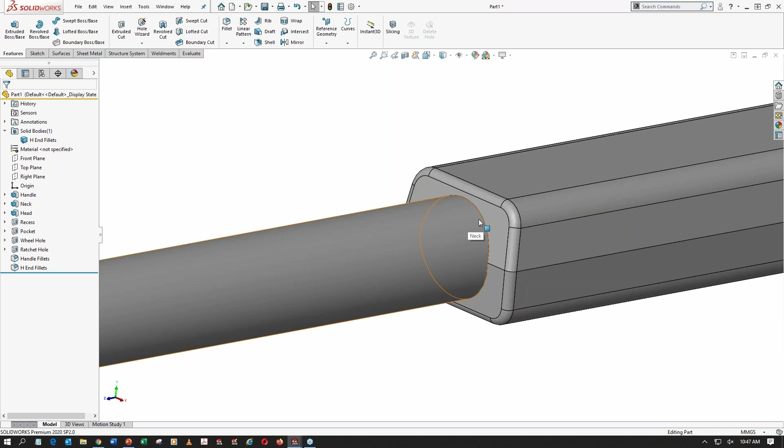And this fillet is going to smooth out the transition from the neck to the handle and from the neck to the head. Now, when you fire off fillets, typically you're always going to choose edges. There are some scenarios where you're going to choose a face. Now, the difference between choosing an edge and choosing a face is when you choose a face, you're grabbing every edge of that face.

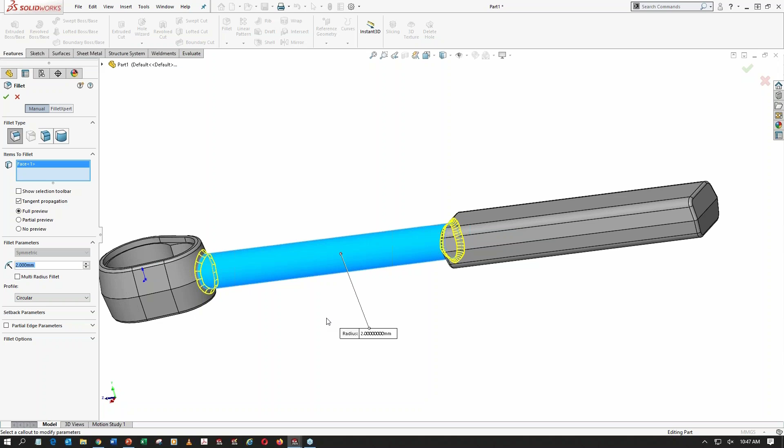So rather than choosing that edge, rotating around, choosing both edges where the neck meets the head and the handle, I can fire off a fillet, and I can do a 2mm fillet and then simply choose that face. Because again, when you choose a face for a fillet command, it's going to choose every edge all around that face. So I can accept that, and then I can rename this fillet to be neck fillet.

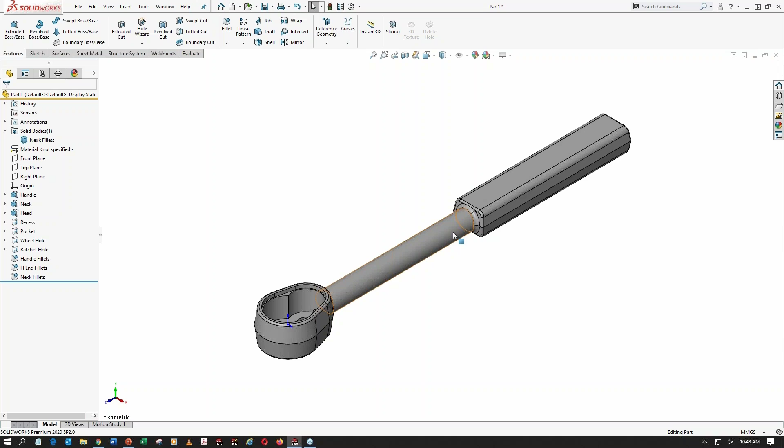So we now have our completed ratchet, and we've talked a lot about symmetry. We've talked a lot about draft as well. I do want to point out one more thing, that if you have different lengths of ratchets that you design, and maybe you want to show this to the person who's going to create the forge, and also show it to the guy who's going to machine the pockets, you could create something called configurations.

So there's a configuration manager here, and I can leave default in there, but I can then create a brand new configuration, and we can call this forged. And if I hit forged, what I can do is I can suppress a feature. Now, suppress is like a soft delete.

It's like when you want to run, but you don't really want to run, so you jog, so it's kind of running. That's like what a suppress is. So a suppress is a soft delete. That's like telling your kid to go sit in the corner. You don't want them to leave, but you also don't want to hear them for 5 minutes.

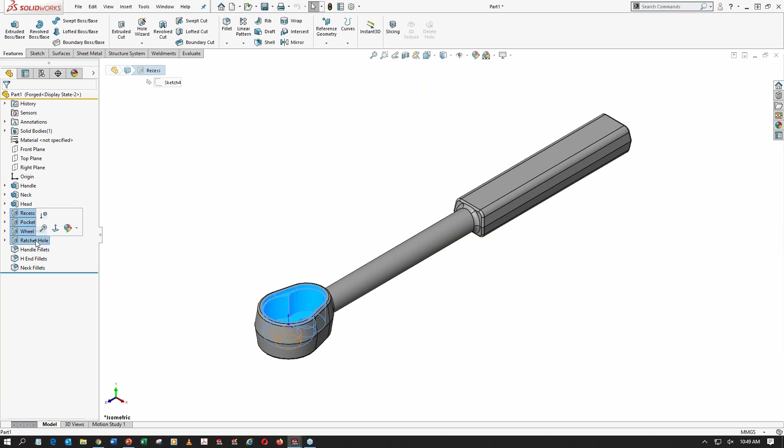So we're going to take all of these features, we're going to hit this down arrow, and we're going to suppress them. So that's in the forged. Now we can add a machined configuration. So I'm going to add a new configuration called machined. Now in the machined, that's where I want to show all of these, so I can then unsuppress those. So at this point, I now have forged, which has all of our cuts gone, and I have our machined, which has all of our cuts active.

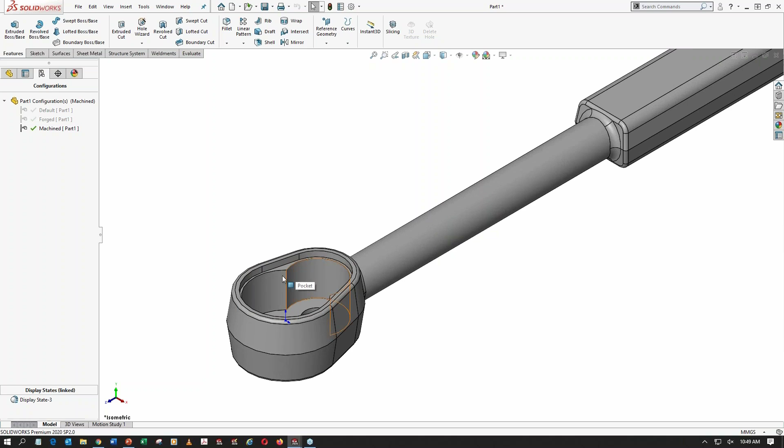Now, you can do that with not only features, turning them off or on, suppressing or unsuppressing. Notice that I didn't delete those features, and if I were to delete the features, then they're gone for the whole model, and I can't use them anywhere else. If you suppress them, you can then use configurations to hide or show them depending on what you want to show.

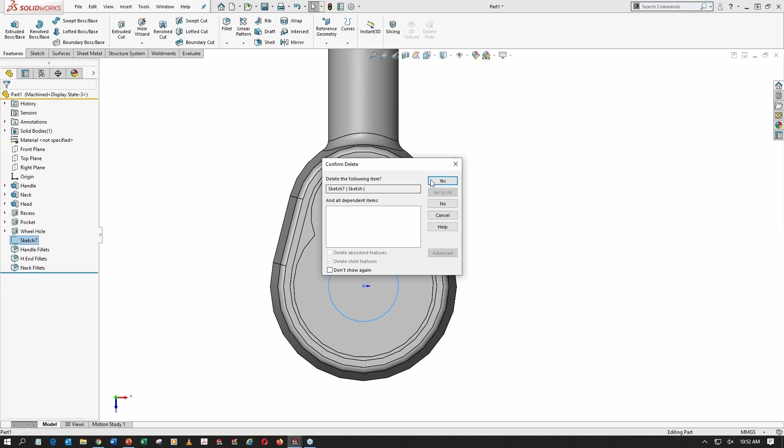We got several people following along. A couple of people were having trouble dragging that hole to make a copy of it. It was instead moving the hole instead of making a copy. Do we need to hold the control key down when we do that one? Absolutely, absolutely. So if I go delete this ratchet hole, and I'll redo that one real quick. And also just note that in online training, if someone misses a step or anything like that, then it's really easy. We'll just go redo it.

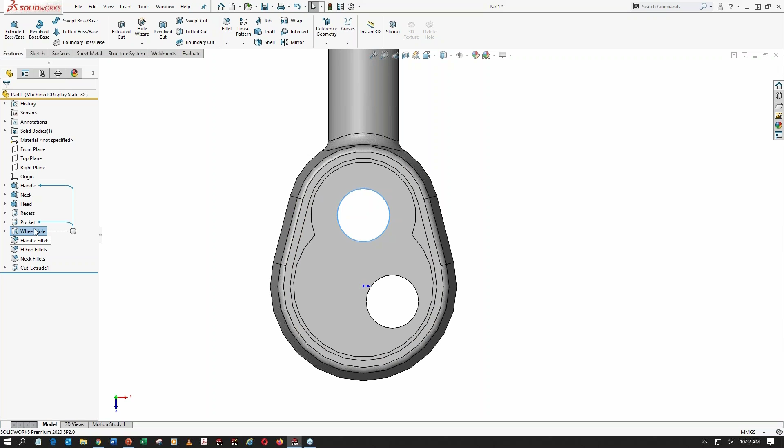It's not a problem. So yes, if you just drag it, then that's going to be an issue. It's going to give you that try again symbol. You do have to hold down control. I apologize, I did neglect to mention that. You hold down the control key, and then you're going to drag whatever feature you want to whatever face you want it to land on. And then I'm going to delete the existing relations, and then all you got to do is edit the sketch and then reposition it. Just make sure you're editing the correct one. Reposition that hole to right there, and then resize it as well.

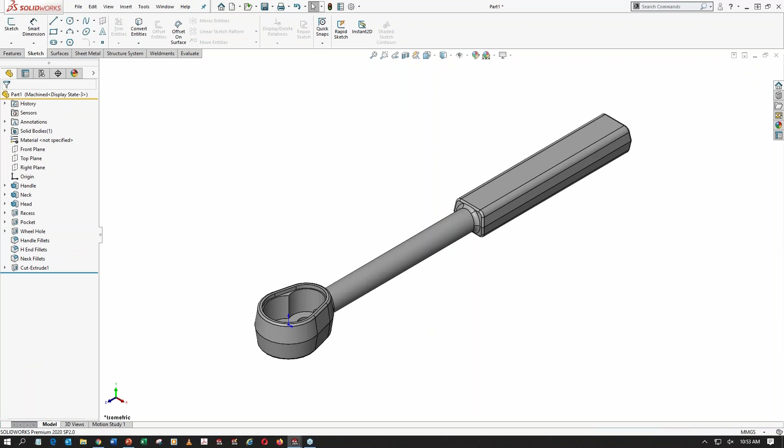Yeah, I thought it would be interesting to let everybody know and see if you wanted to comment on it as far as pace. This pace is pretty close to what you would probably teach a normal class. Is that correct? And then obviously the exception being that there would be a lot more verbal discussion and interaction, and there'd be a lot more checking in on people's progress. Is that fair to say? Absolutely. I would say that this is a little bit quicker than what we would go in an online class, because you're absolutely correct. I'm going to ask people, so hey, Marcus, are you good with that feature? Do you have any questions about that feature? And if you need to show your screen, then we'll switch over and make sure that you're following along and you didn't have any questions or missed a step, much like that, the control drag for a feature.

Yeah, so to do this, you'd want to have probably dual screens, one to see your screen, one to be able to run your own, and then you'll also have the book sitting on your desk, correct? So you'll have a reference to refer back to at any step if you need to go and kind of work behind or catch up on anything, correct? Yeah, absolutely. Triple screen, but one of them is a book.

Yeah. And then those configurations, I don't remember those being in this lesson. Do you kind of throw in some bonus content to some of these lessons, things that you think are appropriate or that would be helpful depending on who is in your class? Yeah, absolutely. A lot of times the questions and the conversation kind of steers us to talk about things that are not necessarily covered in the book, but things that are really important to know.

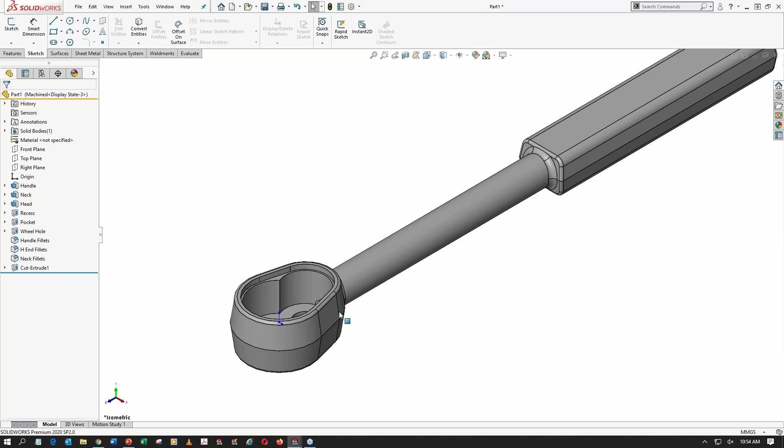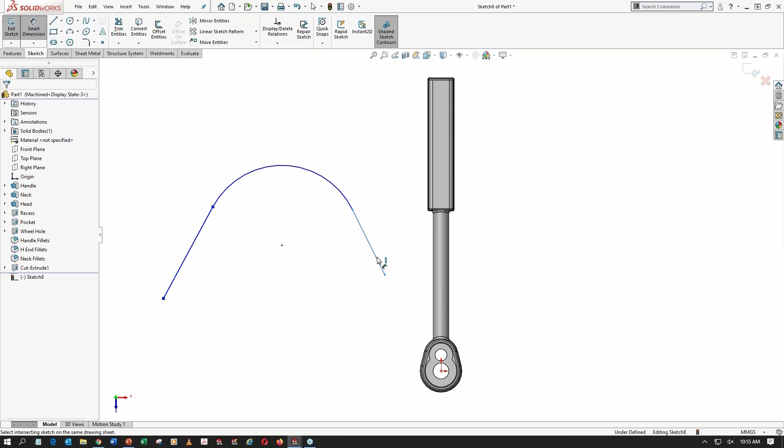Another one of those examples is whenever we're doing the line and arc feature, one thing I like to talk about, and I typically talk about this in an essentials class, is whenever you need to dimension a virtual sharp, something that's not in the book at all, but you could fire off a smart dimension, right click, choose find intersection. Now it's asking you with what, and then you can choose that, and you'll see you have a virtual sharp out there that you can now lock and load as a dimension.

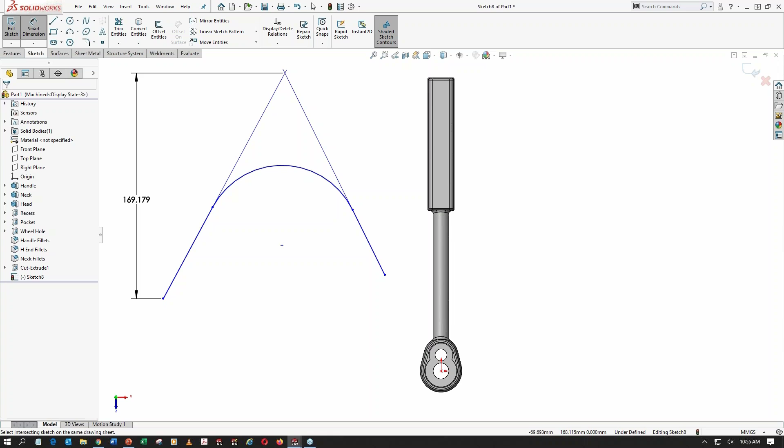That's another one of those examples of something that we like to talk about, and usually I'll ask, hey, does anybody do sheet metal and you have to dimension virtual sharps? Anybody have a challenge with it? That can get tough. So we talk a lot about tips and tricks and then things that aren't necessarily covered in the book and things that will meet everyone's need. So absolutely, we cover things that aren't necessarily in each lesson to make it better.